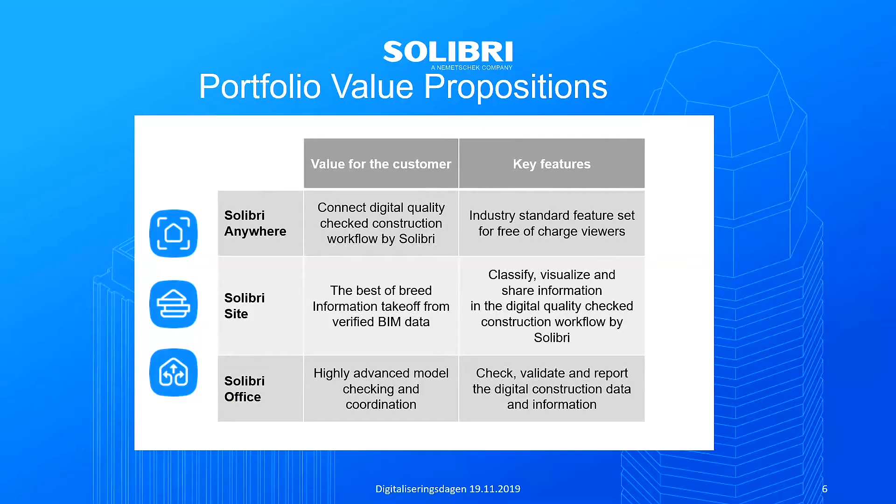And basically this launch of the new product family was made to make it easy that everyone in a construction project can have the data shared together, and so to be able to support the digital BIM workflow. And here you can see that we are making it easy for you to see which are the use cases or who are the users of SOLIBRI. So we see that it's a very good benefit for designers, BIM coordinators, or even people in construction.

Really briefly, I will go through what are the benefits for a BIM coordinator. You can find issues early on, so we have kind of a flying phrase in the office that it's much easier to click on a mouse than remove a brick on a construction site. And of course it's much more cost effective in that way as well. You can coordinate and communicate easily with your colleagues - no more silos in that. You can simplify and automate processes.

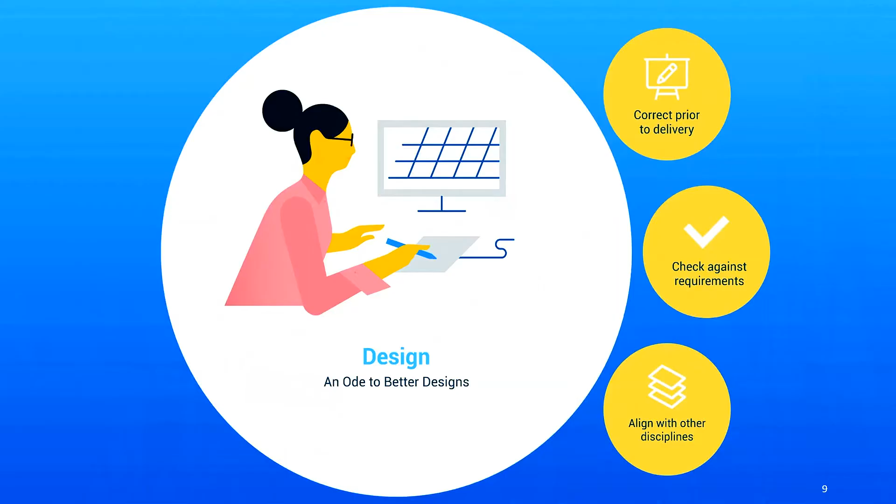If you're a designer, you're probably really keen on correcting prior to delivery. You don't like mistakes, no one really likes mistakes. You want to check against requirements, and that's available. You can align with other disciplines as well. And if you work with construction, better data is for better builds, of course. You want to minimize errors beforehand. You can take off more than just quantities and communicate with the whole design team, from the early phase of the project to the end of the project.

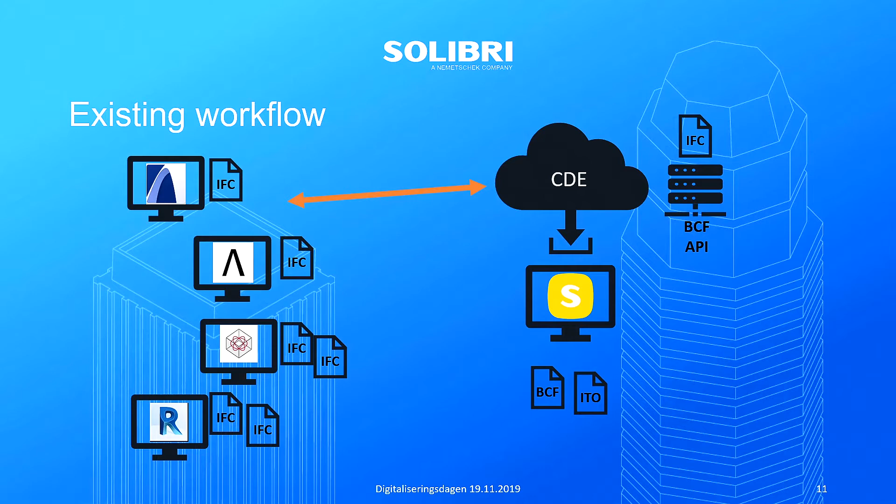CDE is only for the BCF communication at the moment. So again, pretty much manual delivery - press the button, process, and get the feedback back. And all the common storages, most of them are built with gates. You have passwords, so again you have restrictions on how to enter into this storage.

So keeping that in mind, we will see some of the new things that are coming and what's the benefit for you. We are stabilizing the software in general. We are making constant development. Deployment is constant, so you can see more releases, but we are fixing bugs.

We are implementing new things. We are implementing IFC4 constantly until there is a day when we can get the certification for it. We are also improving the performance, so opening and saving models will be faster and more efficient.

So we wouldn't have that problem as we have now, that you save, you shut the software, and your model is gone. So faster and more convenient workflow. And also we are looking forward to seeing ways of sharing the project, doing teamwork, getting more constant workflow with other stakeholders.

So we're coming to customizing the software and automating the process. It means that we have already delivered the rule API, which is in beta process. We are opening up the ITO API as well. It's coming, and also you can manage your hyperlinks and that yourself.

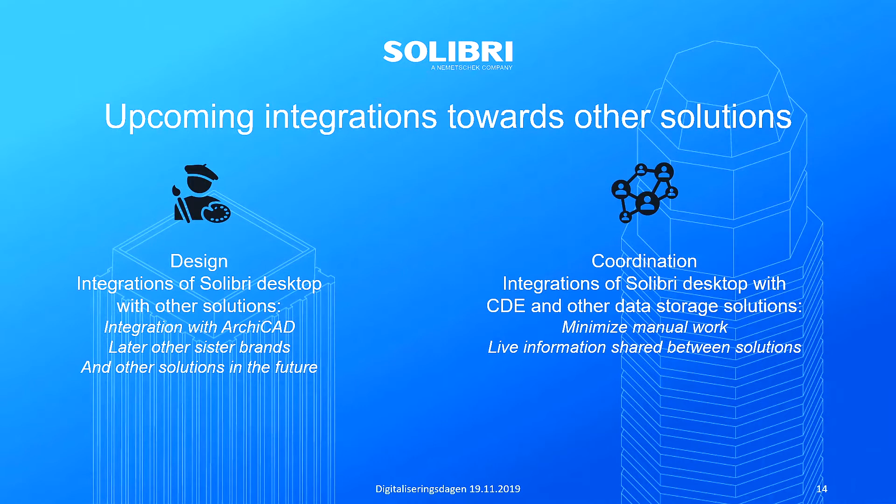With all that, we are actually focusing, not just trying, to get into more coordinated work with the integrations of SOLIBRI desktop, so that we have the APIs, we have open discussion with the different data storages, we have the CDE communication more fluent, and the information exchange doesn't stay only on the issue level - so more constant cooperation between all the stakeholders.

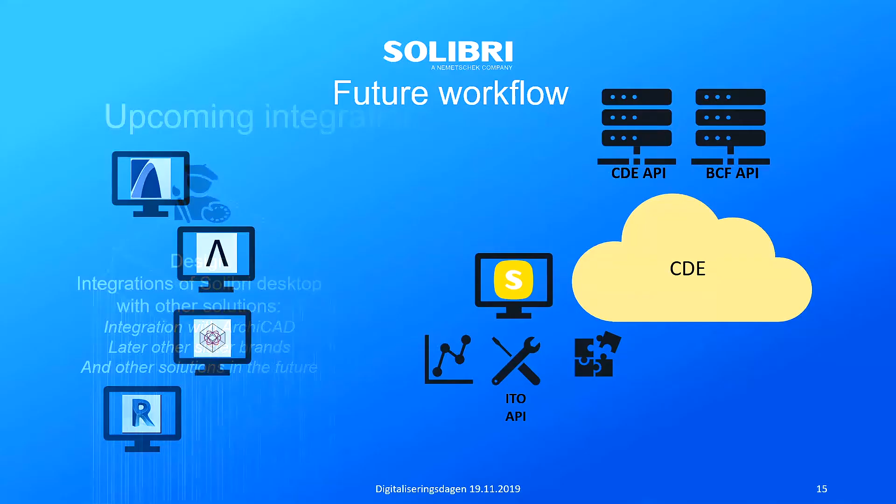So, in the future, the workflow will look a bit more like that. We have the authoring tools, then we have the CDE, and we have SOLIBRI, and we can utilize all the data, the tools with the API and the extensions, and communicate throughout the data storage.

So we are not anymore focusing only on the BCF. The work will go constantly back and forth between the authoring tools. One source, but we still have the platform for SOLIBRI only on desktop. That's for now.

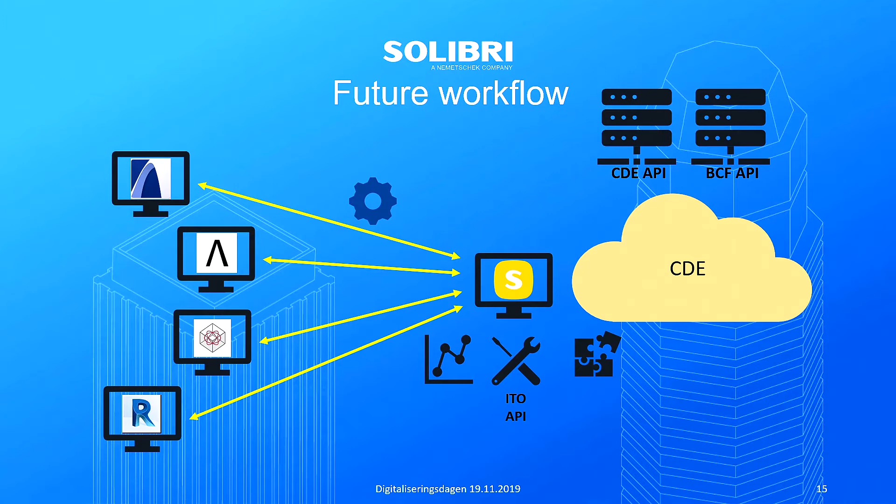What we would like to have is that wheel turning constantly, with rotation going on in the project. Now we just have to launch it, and we will be having more close to live situations. So all that will bring us into the future forecast.

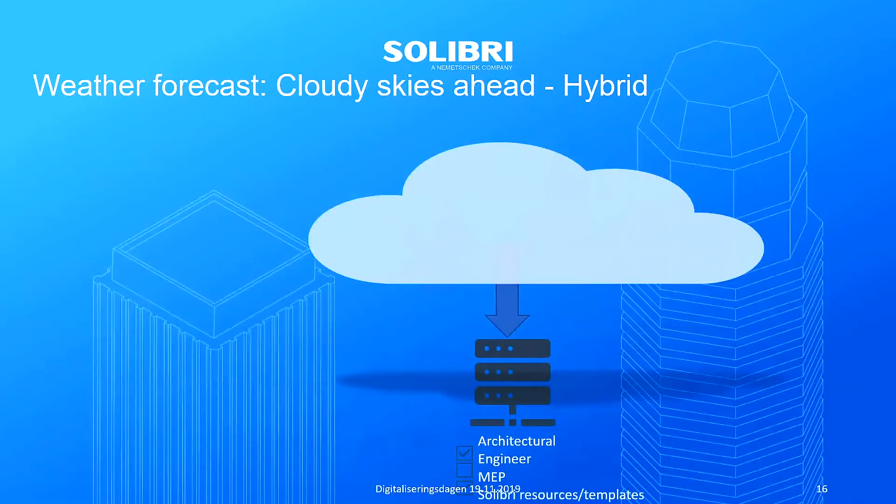You have been waiting for the information about what happens next and what happens next. These are the steps that we are planning and doing now, so that things will happen bit by bit, and you will get delivered in smaller pieces. But in the future, we are going to definitely move to the cloud.

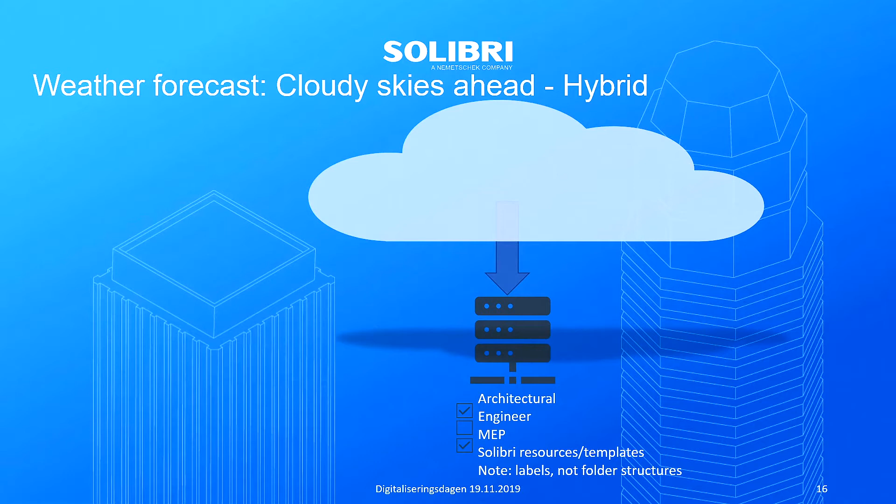So we are having a hybrid version. The architectural model, all the data, will be stored in the cloud servers, and you have the resources there as well. So you will have the model data that you need for Solibri use in there. You have the CDE communication throughout, and then we will have Solibri working through that cloud.

But what it means when we call it a hybrid, is that we still need the basic desktop for managing the resources, delivering the resources to the model, creating the extensions, and also managing the roles in that project. And that's why we call it a hybrid model.

We are looking for different possibilities for how to make it as fluent as possible. And the common question, I know you will have it as well, is when do we go mobile? Probably somewhere in the future, but after all this has been done. This is a very common question that I meet every time I visit a customer, or even at the support table.

So what happens in the permitting process? We have a platform called Lupapiste, and when we establish the project in Lupapiste, we know who is the BIM coordinator - we require that information, and we name also the main designer and the other designers. We have the contact list first, and we have the number for the project.

Designers start to do their work, and at this stage we are talking only about architecture. They will do their work, and what is delivered in the first phase is basically the building envelope, windows, doors, recesses, and roofs, plus all those materials that are reflective to any sunlight or light disturbance in the environment - that requires all the balconies and the glasses on that as well. So that's the detail level in the first phase. I will show you why in a little bit.

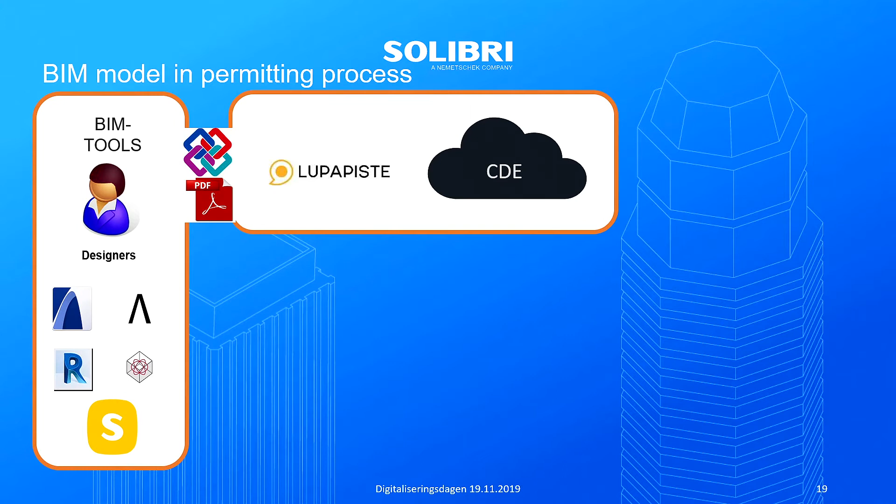The designer is obligated to do this. It's basically a mandatory self-check. They will check the IFC, deliver the report and the IFC into Lupapiste. Main drawings in PDF format plus the IFC. Then we will call out all the important people who are deciding what is happening here.

And they will see this first stage IFC imported into a digital city plan. We are inviting all the authorities, services, but also the neighborhood. And we are having a common meeting, showing them what is going to be built here.

What do you think? We will collect the comments, and send it back to the designer if needed. And finally, when all is checked, run through SOLIBRI, we have the clean report, we can grant the permission.

Then comes the archiving, which is still open. And the whole process is basically done, so we can turn into the production and get to the construction site. All the documentation will be filled during the process if needed, if any special needs are coming. Of course, first we have the architecture, then comes the structural design, then comes the MEP, and we will fill in the information.

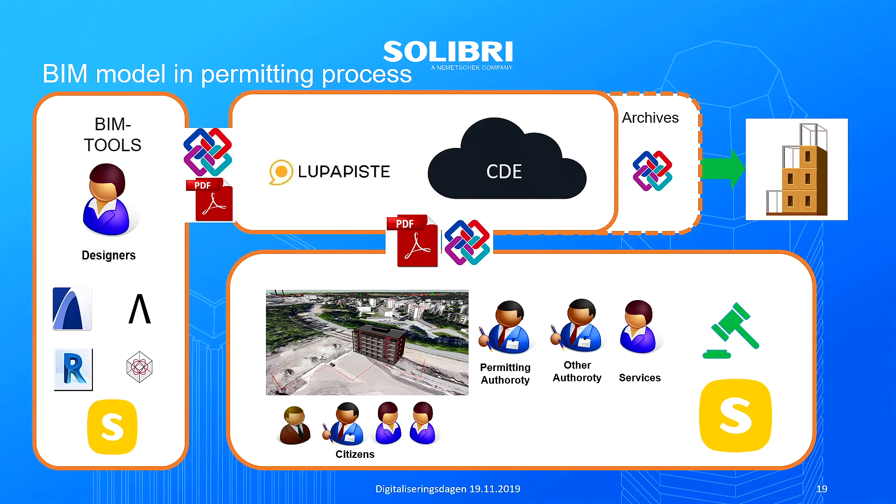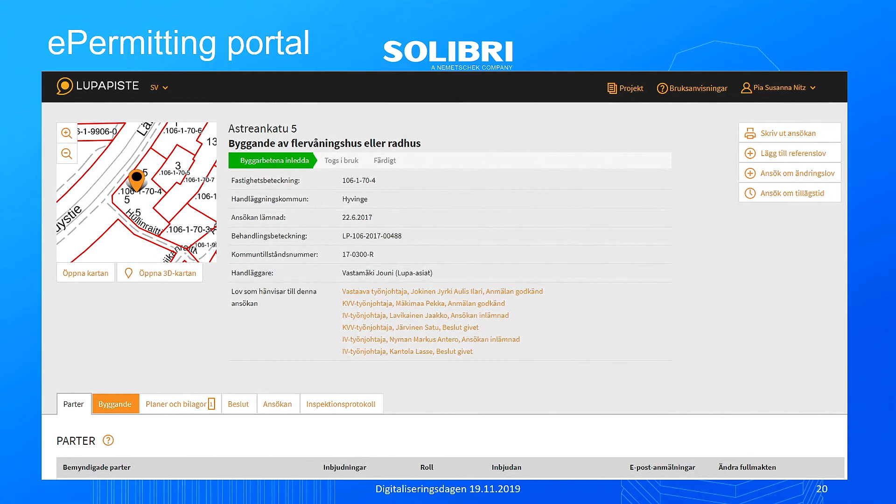And if you are a user here, and you have the rights to enter Lupapiste, you will have this kind of view. This is the basic information of the project. But as you can see here, we have these tabs. It's full of information, and all those who have rights have the right to read the material. It's public information.

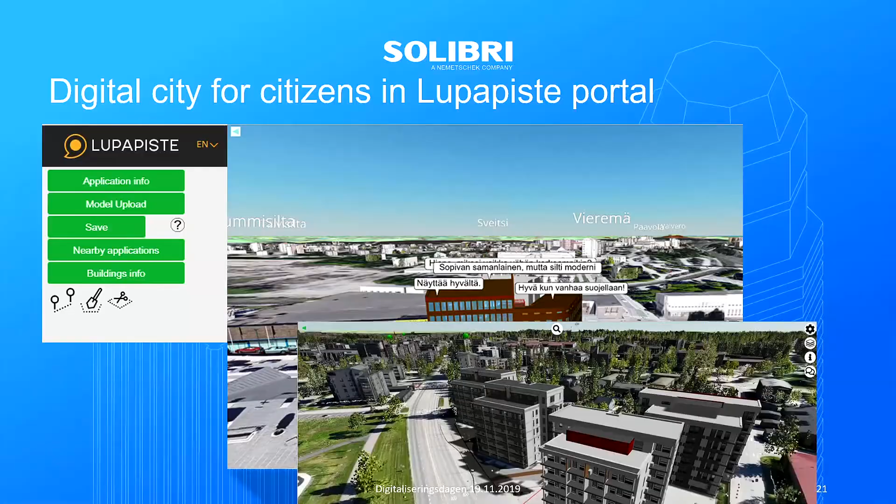Even when we are building bigger areas for residential areas, planning city plans, they are public. We can all review that.

In the old process, all these reviews usually took 3 to 6 months, depending on the scale of the project and how many people it involved. There's the fire department, security network services, the neighborhood, and then the authorities. Every single one was in one meeting, checking the papers, the PDFs, printing them out, making the markings, and then writing the report: not accepted. Now they can all gather around one table and do the review there.

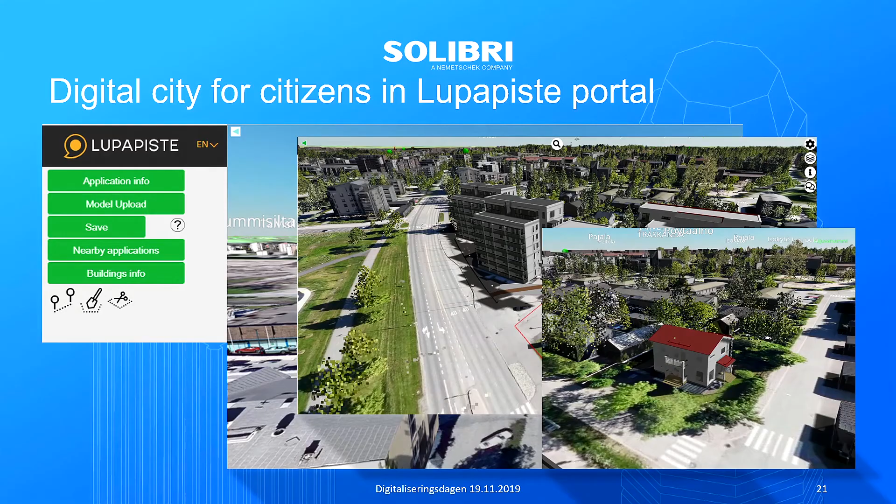We actually managed to cut more than 3 months from the reviewing period with this way of reviewing the plans.

And even if you have a little house somewhere that you want to build, you can review your own home. So the scale ranges from malls to private houses. It's public.

So when it comes to SOLIBRI in this whole process, we know that it's not fully automated. It's not that I just throw out the IFC and magic happens there, and then you get the check, thank you.

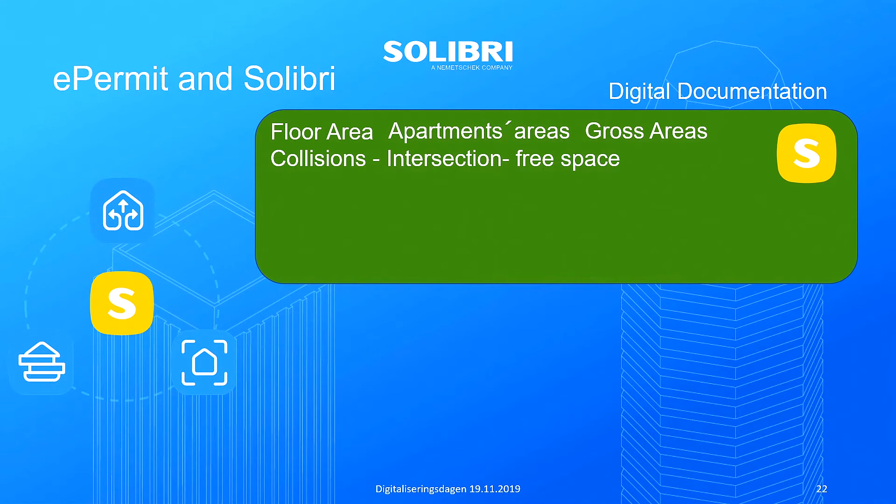We have tools, we have the digital documentation, which is normal. But what we did in SOLIBRI, we are checking very basic things, familiar to every one of you: floor areas, apartment areas, gross areas throughout the building. But then also not just simple collisions, but intersections between different disciplines, free spaces, secure areas to maneuver.

And I'm coming to an important thing that you discussed about organized work, which is that this information has to be in a certain order, mentioned in a certain way. There is a standard for it, and we are trying to follow it.

So when this data is correct, we can report in Excel, drop it into Lupapiste, which will automatically fill in this registry information for the officials. So if you're a salesman selling apartments or renting them, you will have the register automatically. That's one thing.

But we are also concerned about safety issues, of course fire safety. And now we are getting into areas where the level of detail was an obstacle. It was considered too much to fill in the fire rating, sound absorbance rating, and thermal rating for walls and slabs. So that was a big problem.

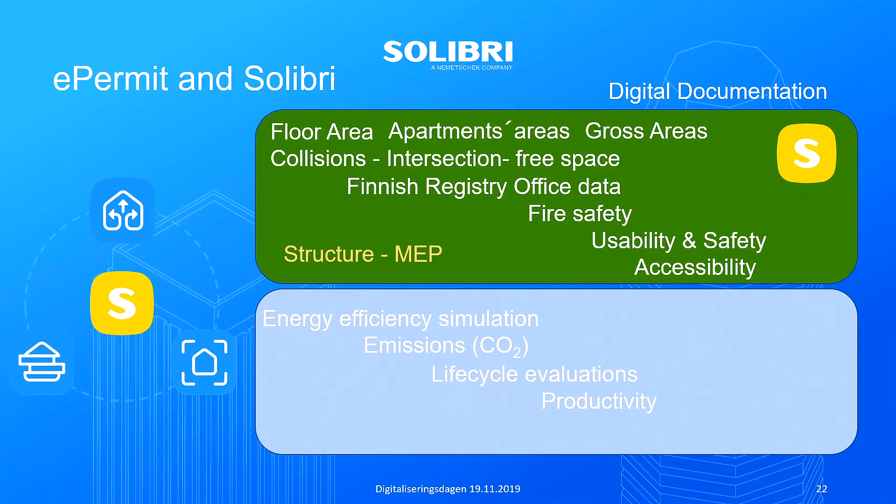Emissions - where to get the information of the CO2 emission. What's the data source? What does it cost? Who will pay for it? And if we had that all done, we would like to have also the life cycle evaluations. What's going to be the situation within 20 years? And of course, productivity - what is the usability of this building? Is it to be modified for some other purposes?

So all this that we have seen now is that what we have to think how to keep the work going, the development going, is that today we are in a situation that we must really, really focus on educating people. Of course I'm a teacher, so it comes first always to me, but we should also educate smaller companies to go towards BIM. It's not, like someone said, it's not rocket science. Let's go for it, you can do it. It's not that it's not simple in the first place, but once you learn it, it's quite effective work.

We should also invest our time for the education, not just for ourselves, but also I challenge you as companies and construction companies to go and give your knowledge to the universities. We have done great work in Finland in that sector, and we will continue that as well. So it's really fruitful work.

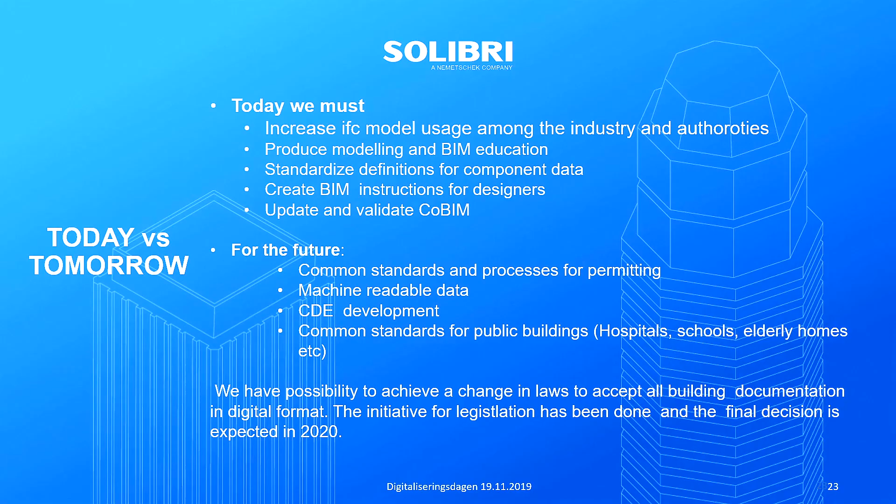And I've been suggesting also that we should have a warehouse where we have these good examples, use cases, rules, all kinds of tools, how to share the knowledge that we have. Look, I have a brilliant idea - let's try it. And like I earlier said...

The possibility to have the official approval for the IFC as a format for archiving - we're expecting that in 2020. But this is what digitalizing is concretely to me. I'm building my environment with the people around me. Thank you.